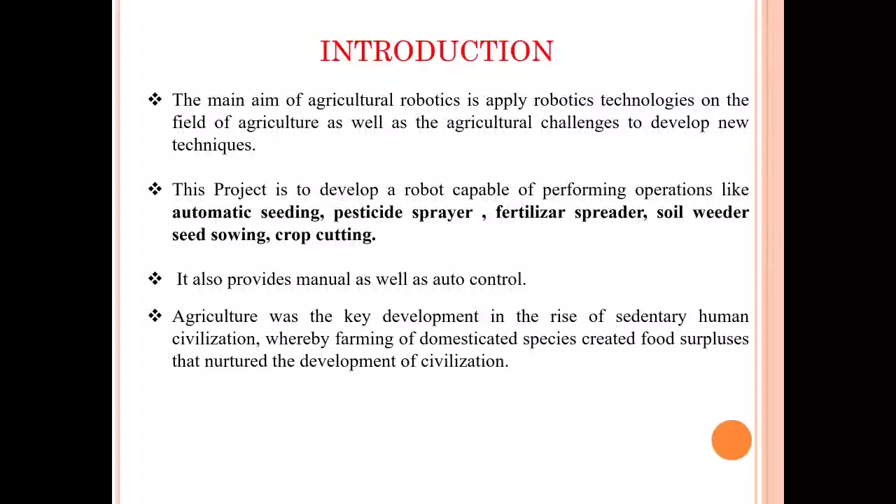It also provides manual as well as auto control if it is properly designed at that level. Agriculture was always key, and to perform research in that sector to improve the robotics and technologies is always in scope. So coming to the objective, the main objective is to prepare an efficient and cost effective system, because there are always a lot of costly machines available in the market.

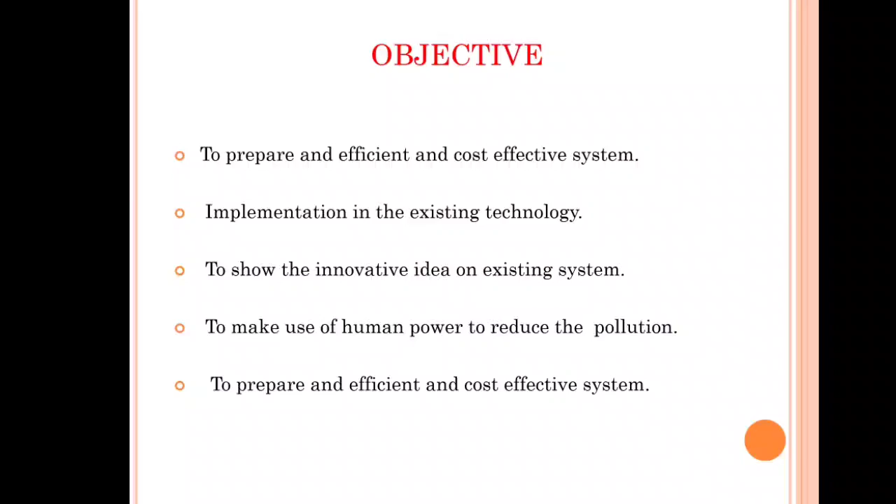We have to implement the existing technology as well and show some innovative ideas so that we can implement it on that machine. Yes, of course, to make use of human power to reduce pollution, to prepare an efficient and cost effective system is always a primary objective. These are some costly sowing machines which cannot be afforded by middle class or poor farmers in India.

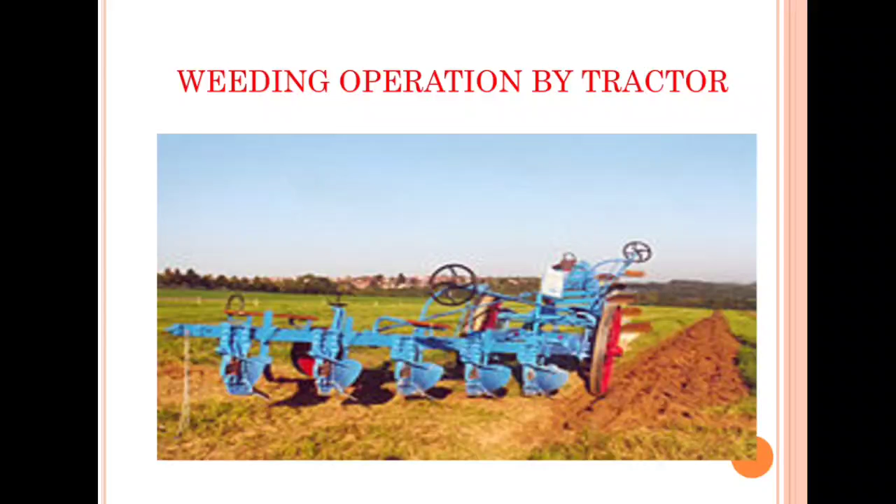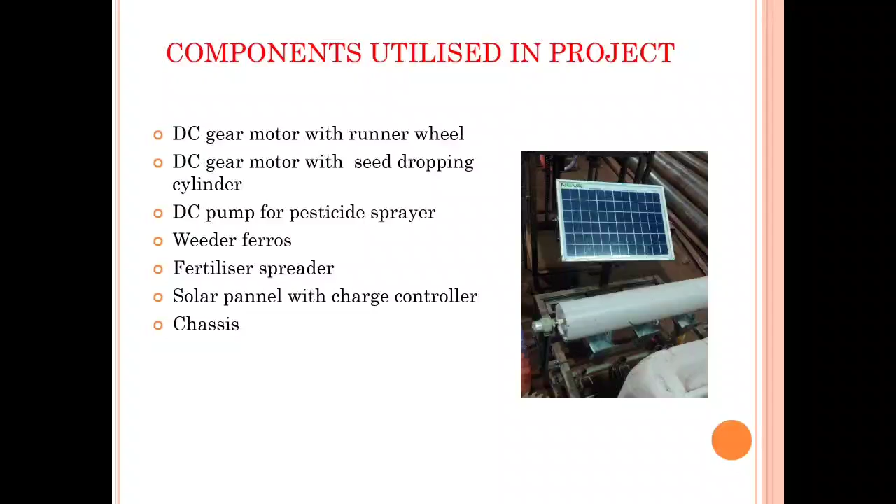So basically, traditionally, farmers used to spray fertilizers manually. Then after that, weeding tractors and other heavy machines came into the picture. Coming to the project part, the components that we used in the project are the DC motor with a runner wheel, a couple of DC gear motors we have used for seed dropping. A DC pump is also there for the pesticide sprayer. Solar panel, of course, as a source of power, and also a chassis to fit all those things on it.

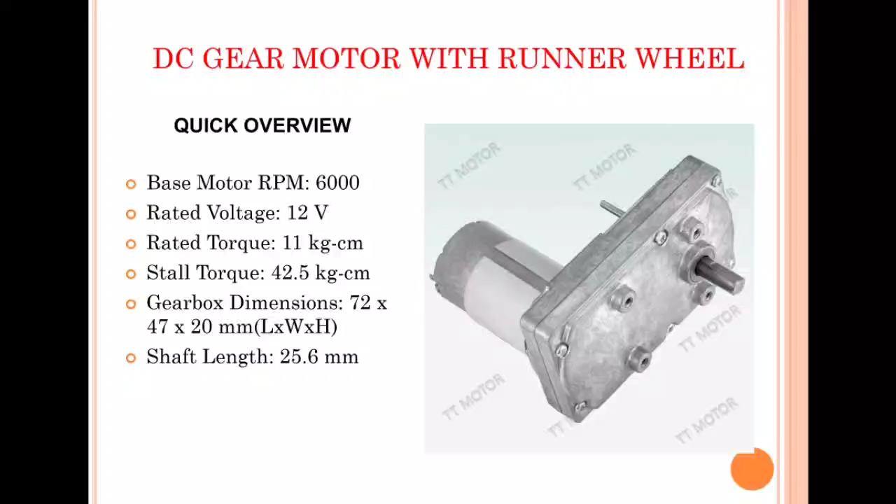This is a quick overview of some components that we used: a DC gear motor with a runner wheel used for the cutting operation. We use high RPM, that's why the motor is of high RPM. Now, DC motor with the seed dropping cylinder. There is a funnel like structure. We are going to drop seeds from there for the sowing operation.

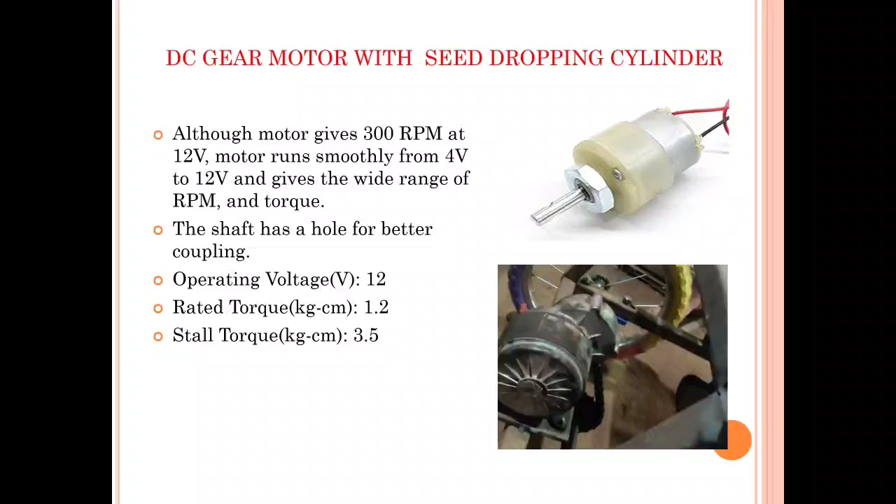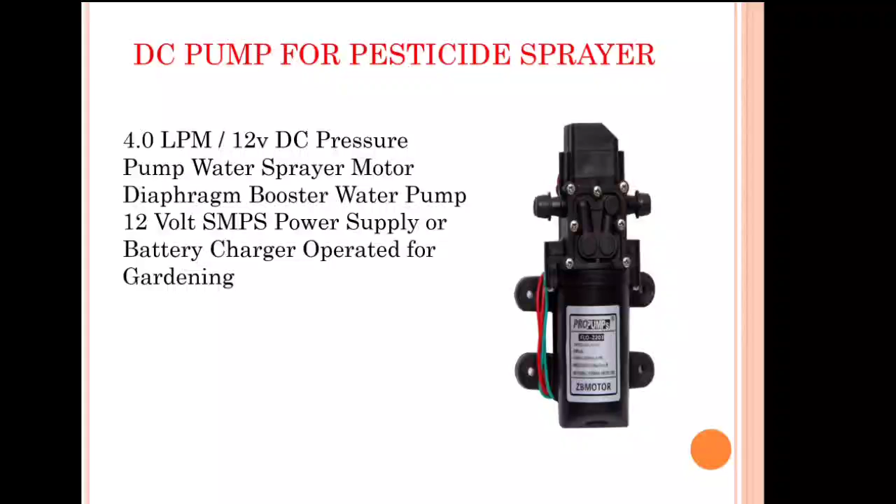So here we propose some design, and we fabricate it so that the sowing operation could get automatic, with the four motors which are running in the desired direction, and the horizontal cylinder which pours the seed, as this robot consists of a funnel like arrangement. As I said earlier, it has a funnel like structure in order to pour seeds into a lower container. That's where the seeds will get dropped.

Also other operations like cutting: two DC motors are fitted along with the cutter wheel, so that it will cut the extra grown crops. And this robot can be further fitted with a bent plate that drags on soil to make the slots ahead of the machine before seeds are poured in it. There are some fork like structures that will sow the soil.

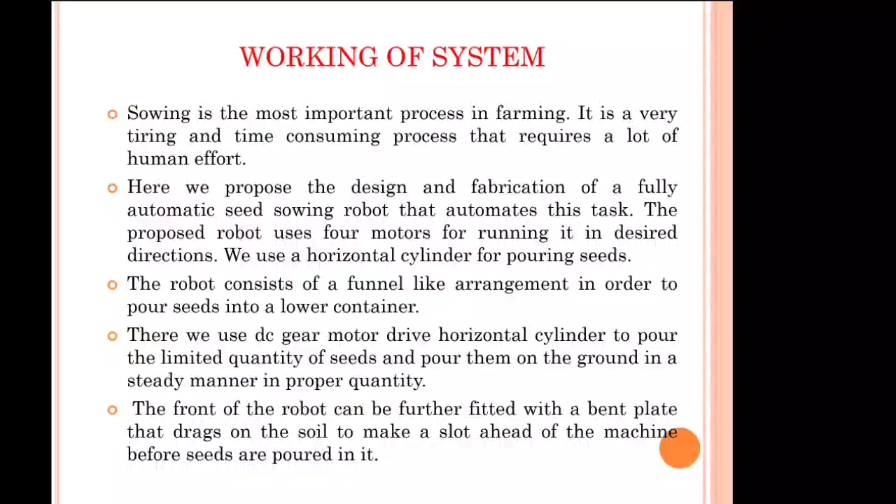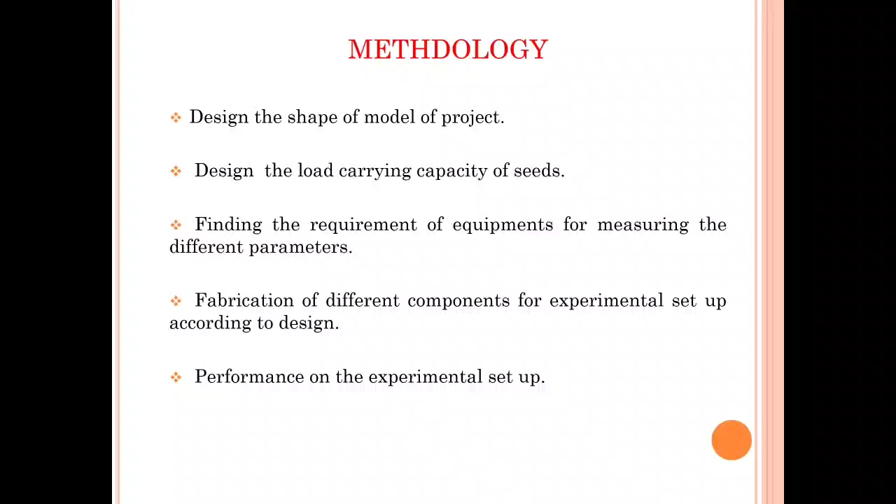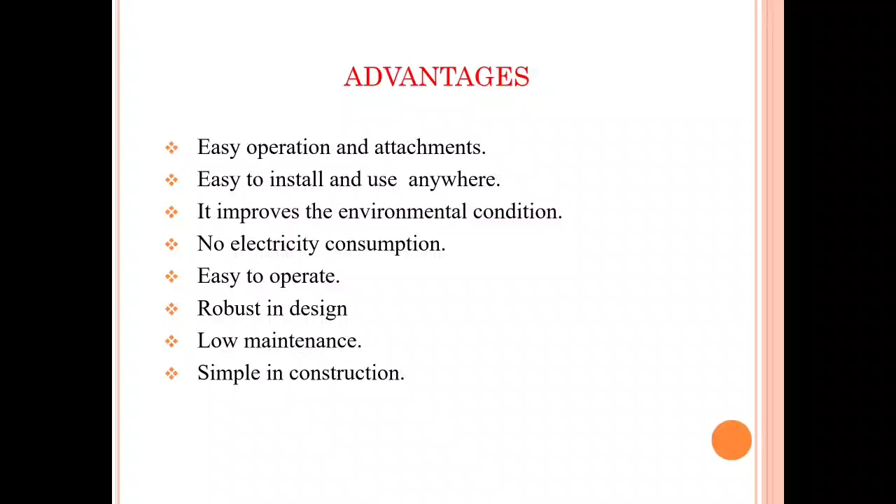Now, the advantages of this are very good, because so much research is done on this thing, but a cost efficient machine is not yet manufactured. So easy operation and attachments, no electricity consumption, easy to operate. Yes, it is a robust design, not a complicated design. Maintenance cost is comparatively very low, and construction is also simple, so that anyone can repair it and anyone can look into it and understand the working.